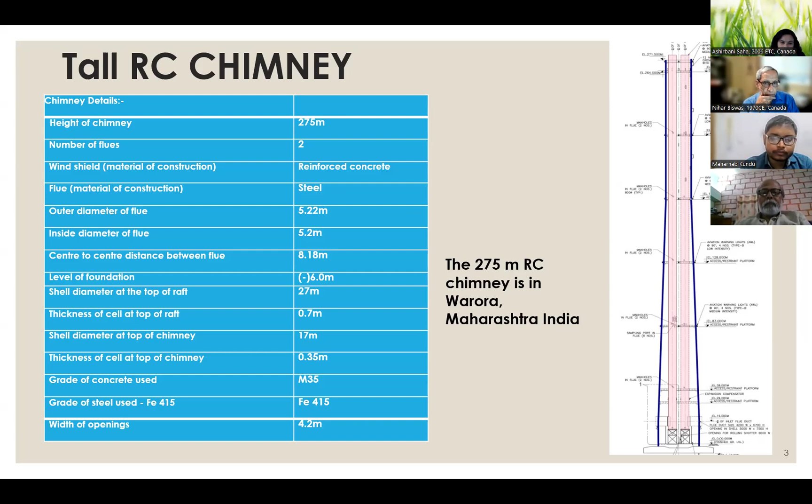Slipform is used for the construction of the chimney. Slipform is a process by which we construct the chimney, and as construction of one phase completes, it can go to the higher phase. It can move up by two processes: either by pulley and rope, or by manual handling. An advantage of slipform construction is that it increases the speed of construction, and different gradations of the structure can be constructed by the slipform process.

Now, why are we doing this research? The vortex effect is very important here. In a tall chimney, when wind comes in one direction, a low pressure is generated around the chimney on both sides, and due to this the chimney oscillates in the direction perpendicular to the wind. When this oscillation frequency matches the natural frequency of the chimney, resonance happens, and when resonance happens, the chimney can collapse after some time. This is the main problem of the chimney structure when we consider the wind load and wind effect.

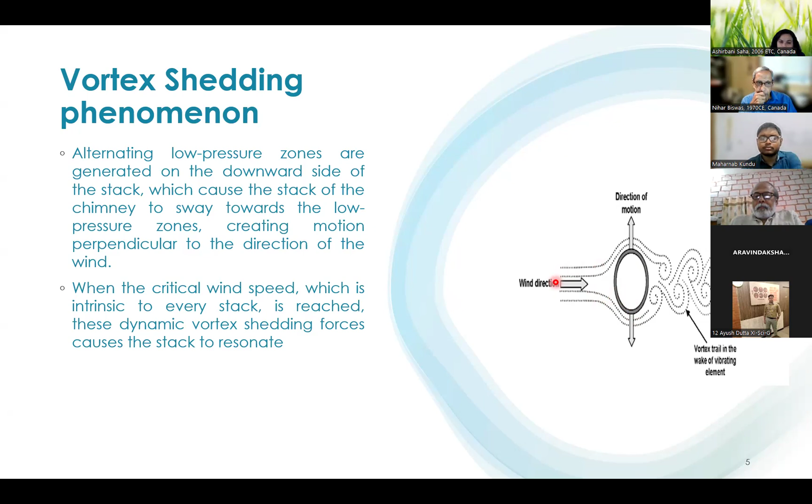So now the scope and objective of my project research work. I am doing research on numerical analysis of slipform structure, considering many effects: the vortex shedding effect, and the interaction between slipform and chimney. My contribution is the uncertainty in the stochastic load.

What happened when we are using the IS code model, the Gioson model, and also the stochastic model? What happened to the across wind in that direction, in the across wind method.

What is the vortex shedding effect? Also, the main part is the literature review on the stochastic approach. So what is that which I am going to contribute - that is my contribution.

So the methodology which I have followed: I have calculated the dead load, live load of the chimney and the slipform structure, the wind load along wind direction and the across wind direction. Across wind direction I have taken in three methods.

First is the IS code method, that is IS 4998:2015 approach. The second is the Gioson method, which is a research work by a scientist. From that, I have done the research.

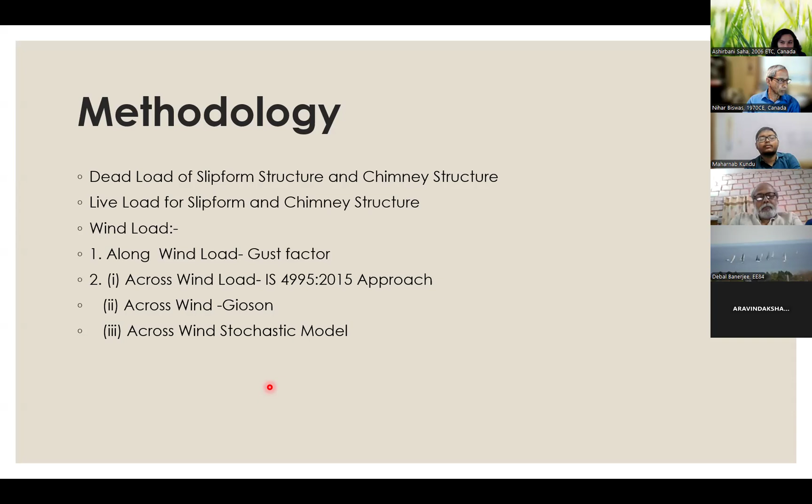I have done further research work on the across wind method, and also the across wind stochastic model. This is my contribution in this research work - the stochastic model of the across wind method, in which direction due to vortex shedding it can fail. This is an uncertainty method.

Here we can take an uncertainty factor. Also, this is a random factor we are using here, which can vary from 0 to 2 pi.

Due to this, what happens is because wind is a dynamic force, it can have higher velocity, also low velocity, and at different heights it can have different velocity. So we are taking a random value. Depending on this, we see what happens on the slipform chimney structure.

After my research work, I got into the results. Here are the three models I am taking for across wind. First is the IS code method, which is increasing linearly, and this one is the Gioson method. Here, the Gioson method and IS method are taking us closer to the original value.

What happens to the chimney at the high edge? It is taking a higher value. But when we take the stochastic model, there is a large difference compared to the initial two.

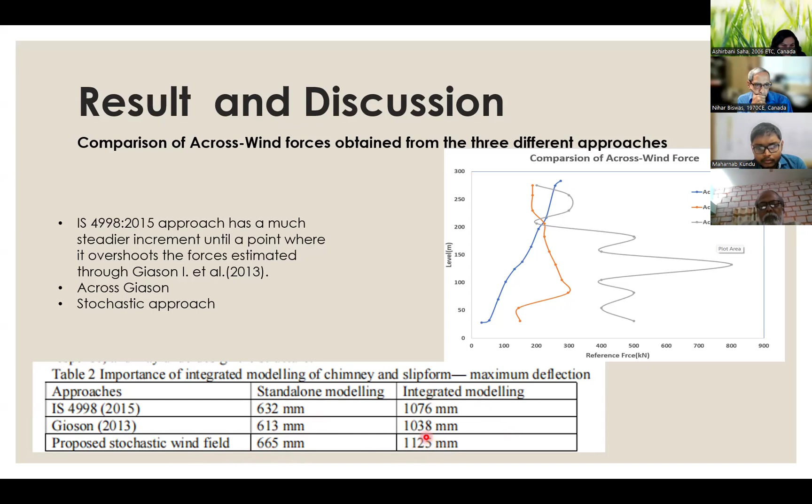This is the conclusion I made from the research work: we are taking the IS method and the Gioson method initially, but this may not be the safe method.

From the graphs I have plotted, we are seeing that the stochastic model shows there is a very urgent need to implement this also in our construction of the slipform structure, which can help the chimney structure last for a longer time. This is the conclusion from my research work.

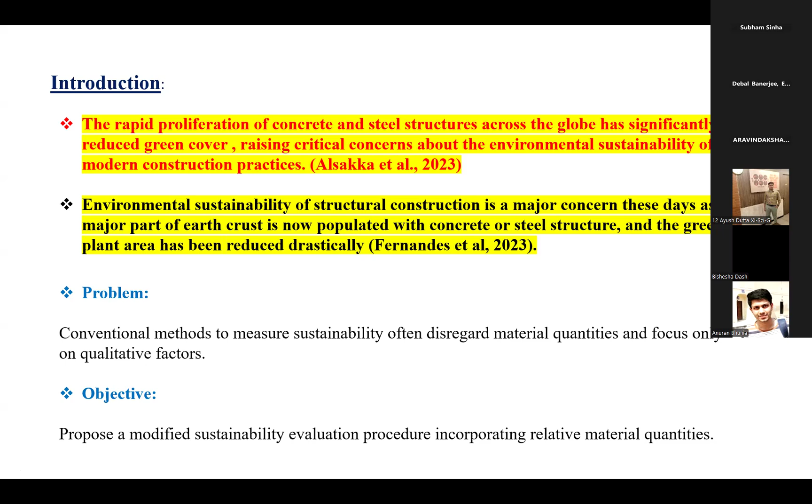Here are some studies that I reviewed for this project. The main paper was on the structural assessment of concrete structures within the Spanish structural concrete code, an ASC paper published in 2013, where they discussed the index of contribution to environmental sustainability, the ICES model. We have improved the ICES model to make it MICES, the modified ICES model. We also studied other works using similar mathematical models for housing interiors in Iran; in England/UK they used mass weighing criteria for different building systems; and in Spain they used such models to analyze government projects like buildings and mass housing.

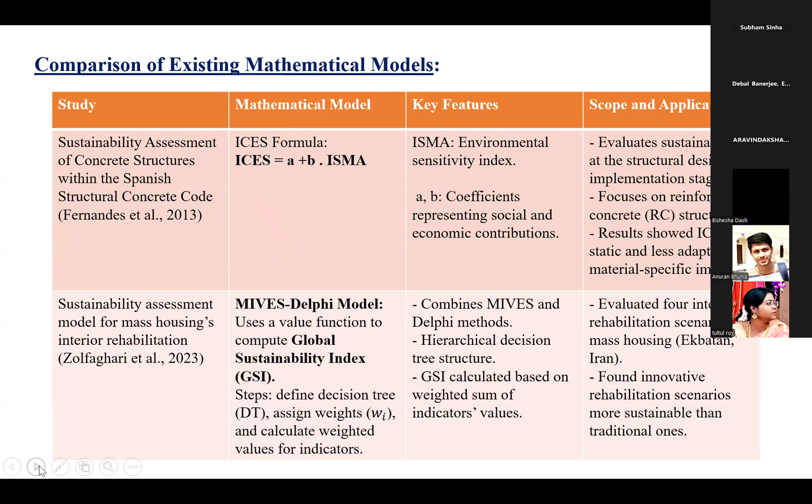Here are some mathematical models that I compared. This is the main formula: ICES equals A plus B times ISMA, where A and B are two different coefficients representing contributions due to economic, social, and environmental sustainability. Here are more mathematical models based on the same statistics, the MIVES, which I will explain later. So what we have taken is this volumetric weight decision criteria.

So this is the Spanish structural concrete code, which translated into English refers to the integrated value model for sustainability assessment. In Spanish, it is abbreviated as MIVES. This is the ISMA index.

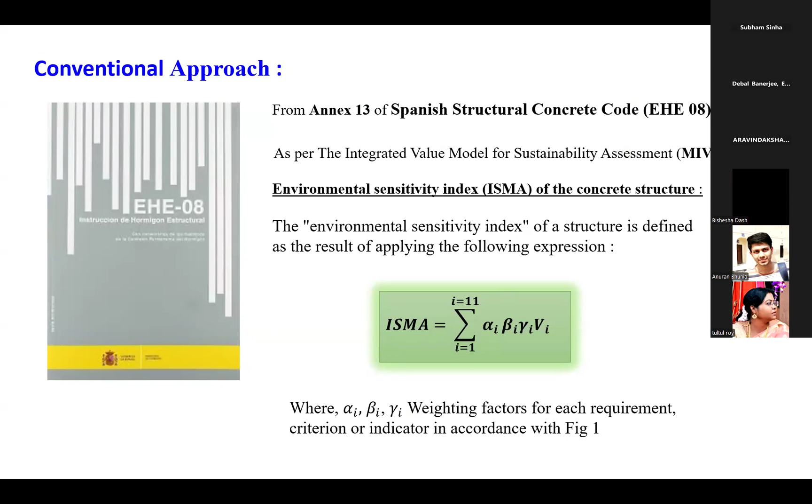The index depends upon four major factors: alpha, beta, gamma, and V. There are 11 different criteria that should be considered. These include characteristics of the concrete supplier and characteristics of the reinforcement supplier. This is a tree type of model.

It depends upon different environmental sustainability for different levels of criteria: the criteria level, sub-requirement level, requirement level, and assessment level. At the criteria level, which is the most basic level...

...we consider characteristics of concrete supplier and characteristics of reinforcement supplier. If the reinforcement is environmentally sustainable, there is still a characteristic - reinforcement reduction criteria: is the design optimal to use less steel or less concrete, or is the steel recycled enough? Recycled steel is more environmentally sustainable.

So VI is the value factor determining each criteria according to this expression. It is an exponential expression where KI, MI, NI are different small factors that have been broken down as per the Spanish structural concrete code, the EHE-08.

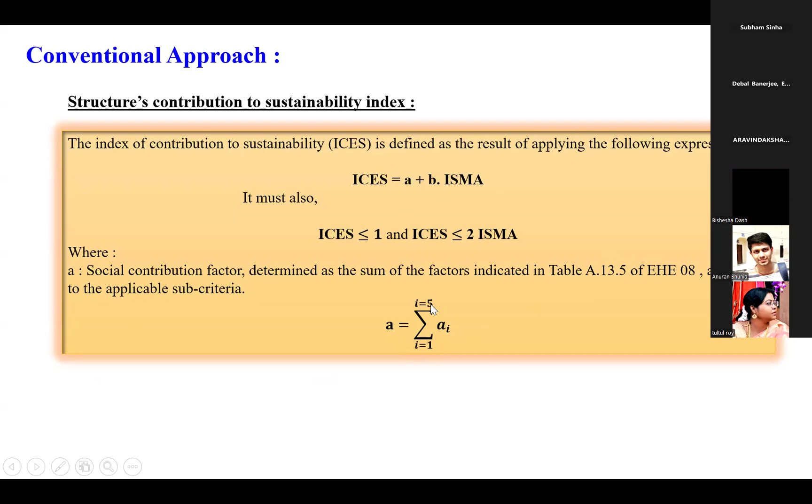After that, we get the ISMA value, and we have to multiply A and B. A is the social contribution factor, determined by the sum of different factors from table A.13.5 of the Spanish code, with 5 different criteria from the different models.

B is the working life - if a structure's life is long, it is more sustainable. We have to pay less, so it is also economically sustainable. From this model, we can get 5 different levels of environmental sustainability, from A to E. A is the maximum end of the scale and E is the minimum end.

So ISMA considers the environmental impact of the ingredients, waste recycling - particularly ferric waste - decreased CO2 emission, steel production, level of execution control, and different types of mixing of concrete.

For example, if concrete is mixed on site, there is more pollution - more dust pollution, air pollution, and different kinds of issues. Contractors may have to take different precautions to prevent those things, like spraying water or using some kind of barrier. Those are less environmentally sustainable.

What they have seen is that concrete pre-mixed from a ready-mix concrete plant is more environmentally sustainable. Precast concrete beams and precast concrete columns are also more environmentally sustainable since they come precast from the factory - we don't have to make the concrete or the design ourselves. Engineers design them and they are mass produced in the factory, so that is more environmental.

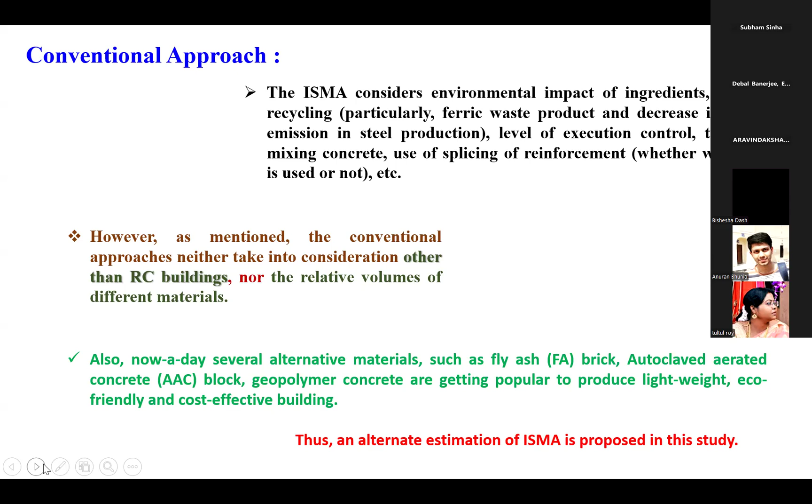The Spanish code gives different values like 0.2, 0.3, and so on. Here we have taken the materials we use in our day-to-day construction in our country, like India - reinforced concrete construction, clay brick construction, autoclaved aerated AAC brick construction, and fly ash brick construction.

From our literature review, we found that they have given some environmental sustainability index values to each of these materials. We can infer that autoclaved aerated concrete may be 1.33 times more environmentally sustainable than reinforced concrete, because it is precast and coming from the factory, mass produced.

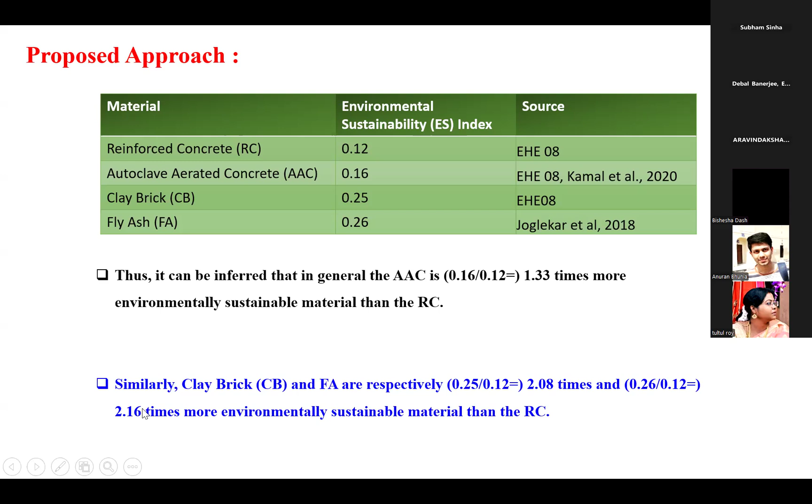Similarly, clay brick and fly ash brick are more like 2.08 times and 2.16 times more environmentally sustainable than reinforced concrete. So we can compare different values and get 1, 2.08, 2.16, 1.33 for different materials as compared to reinforced concrete.

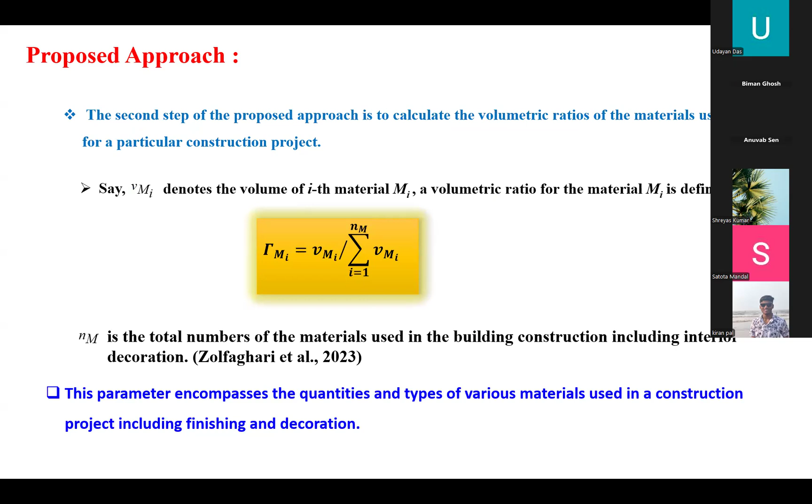Then we have calculated the volumetric contribution for each material. Like we have concrete columns, concrete footings, but we might have clay brick walls or autoclaved aerated AAC brick for parapet walls or non-load bearing walls. So there are different materials which have different volumetric contribution to the whole project.

This is the modified value where we have multiplied the different values - the summation of different values and the relative environmental sustainability assessment of their materials. Then we have proposed this MICES, the modified ICES model.

Similarly, if we use 50% for RC construction and 50% clay brick, as in my example with concrete columns, concrete footing, and clay brick walls...

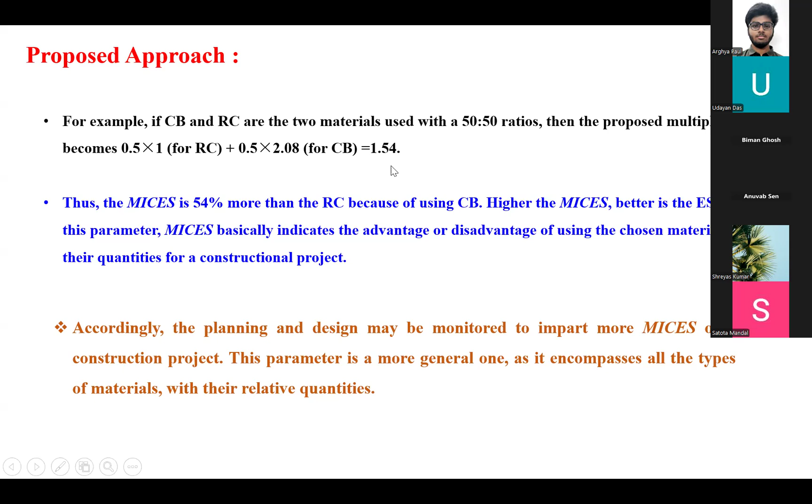What we have found is that the existing model gives 0.14 to every material, which is not correct. But our own model, the modified ICES, MICES model, gives different values to different materials. So we are getting an interesting result that we can compare different materials for their environmental sustainability.

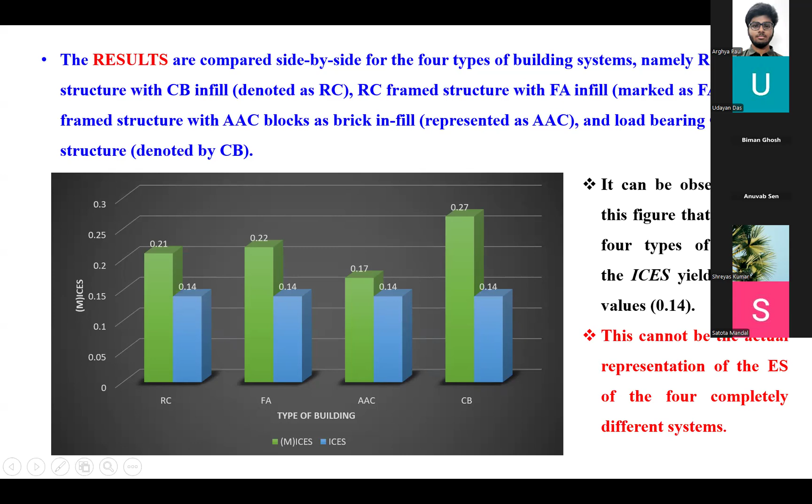So we are getting that the load bearing clay brick has the highest MICES value, and the autoclaved aerated concrete, AAC brick, has the lowest MICES value.

You need to wind up fast, huh? Okay, need to wind up fast.

Okay sir. So what we have found is that the RC system utilizes clay brick infill, which enhances overall sustainability, and the AAC system is lightweight and cost effective.

The new ES measurement is for the construction project. A modified version of ICES is defined, which is taken into account for new environmental sustainability measures, and the effectiveness of the proposed environmental sustainability approach is well established with the two-story building from our numerical study.

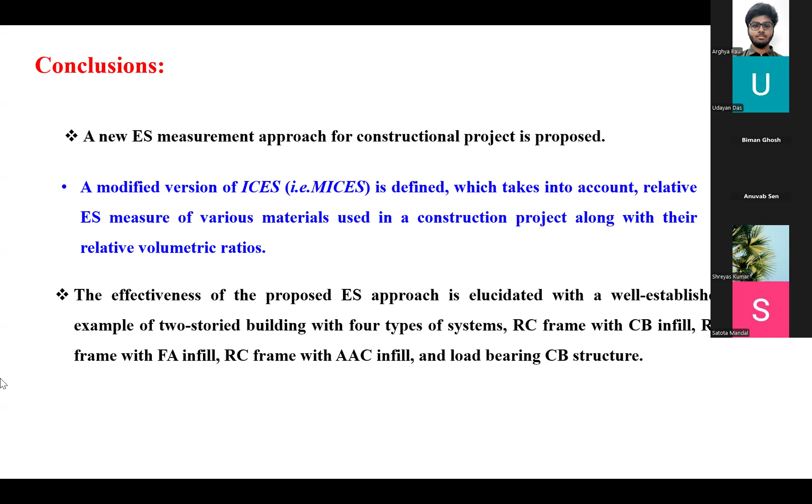So here is our conclusion: the approach we developed is generic and can be applied for any kind of construction. But for better understanding of our model, we need huge data, which is not so possible to collect in our country, where the construction industry is not so well regulated.

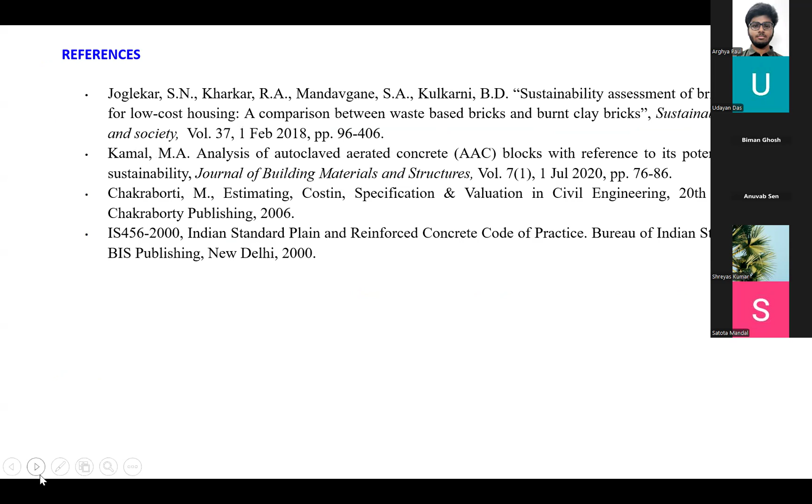Yeah, Arnab, it's a very nice presentation. Before the others start discussing, I'm just going for a very fundamental query. Sustainable is a word available in dictionary, its meaning is very clear. But does sustainable have any relation with the United Nations? Does the term sustainable have any relation with the United Nations?

Do you know it? Sir, sustainability came up like after 1950, when we got to know about global warming and the ozone hole destruction and all the other things. When we got to the key causes of all the effects, we found that more carbon emission, more construction is a huge part of our pollution. So, yeah, United Nations came up. Carbon emission is related to climate change.

But does sustainable development relate to sustainability, sir? Are you aware of the term sustainable development? No. Yes sir. I mean, does it have any relation with United Nations? Yes or no? No. Okay fine. So I think, no sir, it's a global term, development goal.

Yeah, sustainable development goal, Parthoda is asking. Any idea? There are 8 criteria for sustainable development goals. I couldn't remember every term, but I know there are 8 or 10 different points that they have pointed out. The point is, whenever you are going for the Goal 12 index, it is directly related to your work. Yes sir.

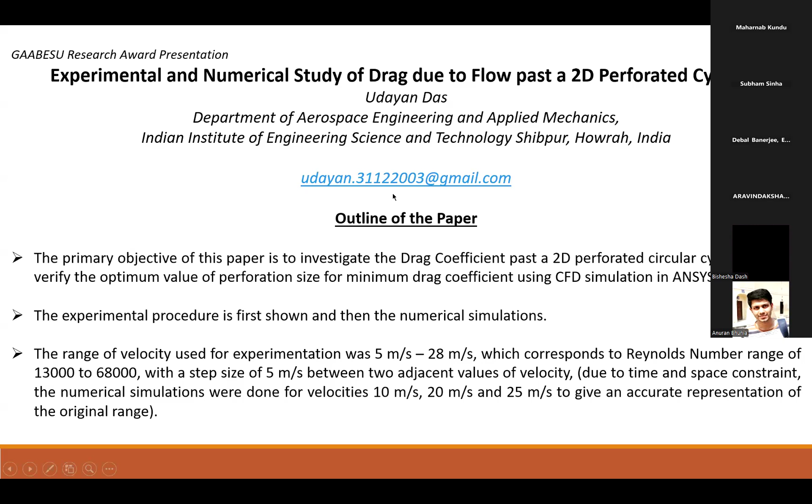Now the baseline data - the baseline data was actually the cylinder without any perforations on it. That was the baseline data.

Now the baseline data was actually verified with existing literature by Dr. Bearman. Figure 4 is the existing literature and figure 3 was a plot that I got. For Reynolds number in this range, from 13,000 to around 68,000, the value of the drag coefficient is coming close to 1.2, which is actually verified from the plot here. As you can see, the CD value here is also close to 1.2. So our experiment is on the correct track.

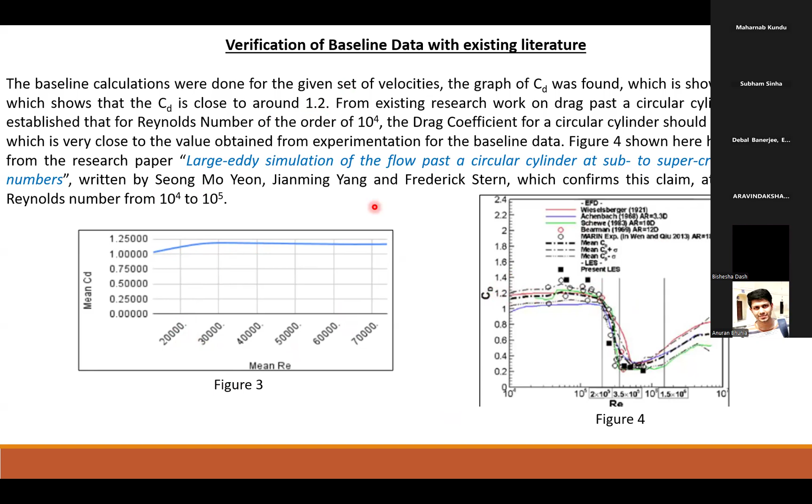Now after the experimentation, these results were obtained. In these results, how we made the perforations was: in one of the stagnation regions of the cylinder, the perforations were kept constant at around 1 mm. For the other stagnation region, the diameter of the perforations was changed from 1 mm to 1.5 and to 2, with a step size of 0.5 mm, continuously increasing the perforations.

Now for the numerical simulation, this mesh was made. You can see this is the ambient flow field and the cylinder is somewhere in the center, and this is the magnified view of the mesh around the cylinder. Another thing to be noted here is that I did not mesh the wake of the cylinder - I did not refine the mesh at the wake because in this paper we are not studying the wake of the cylinder. Basically, we are studying the flow over the cylinder.

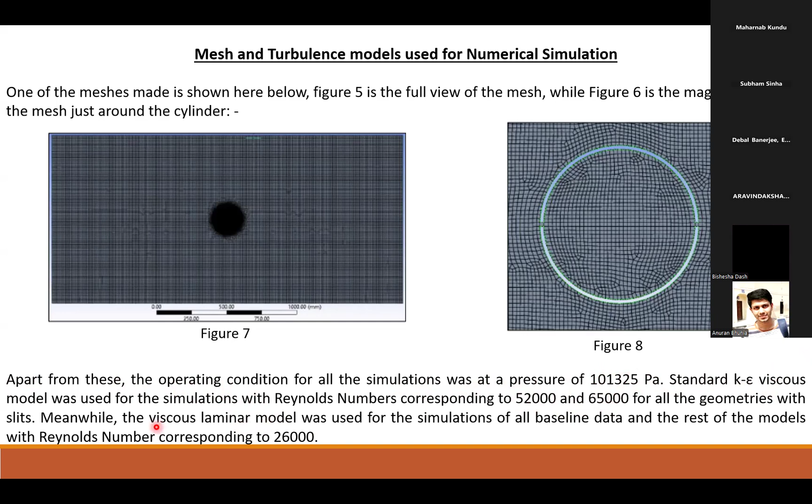The operating condition for all the simulations was a pressure of 101325 Pascal, the normal atmospheric pressure. Standard K-epsilon viscous model was used for the simulation with the higher Reynolds numbers, 52,000 and 65,000, while the viscous laminar model was used for the lower Reynolds number.

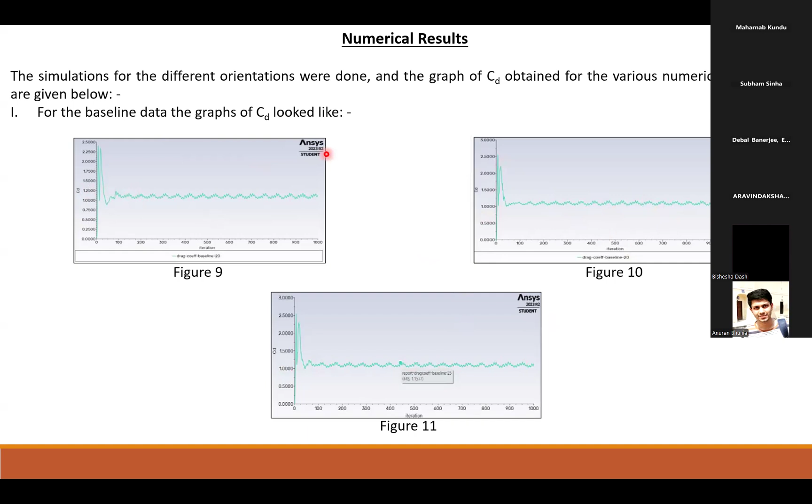Now these are the results obtained from the numerical simulation in ANSYS 2023 R2. This is the result for the baseline data, and we can see that just like the experimental data and existing literature data, the drag coefficient past the cylinder should be close to around 1.2, and that is even visible here, close to 1.2. So the numerical simulation is going in the correct direction.

The upcoming plots that you can see are for the other orientations of the cylinder, as you can see. So I will just go past all this and directly come to the final result here.

Now the trends can be seen below. Here are the legends that are given. These points in black are for the baseline data. The left plot is for the forward stagnation region where perforations were of higher diameter, and the rear stagnation region perforations were kept constant at 1 mm diameter.

And the plot on the right is for those orientations of the cylinder where the forward stagnation perforation was kept constant at 1 mm and the rear stagnation perforations were changed. One more thing I want to add is that the x-axis actually represents the Reynolds number - I forgot to label the axis. The x-axis corresponds to the Reynolds number, and the y-axis corresponds to the drag coefficient of the cylinder.

For the baseline data, we are getting the highest drag coefficient, which should be there according to the experimental data too. And for 1.5 mm perforations, we are getting the least. This numerical solution verifies the experimental data too - in the experiments also we got the same result, where for the perforations of 1.5 mm, the drag coefficient was the lowest.

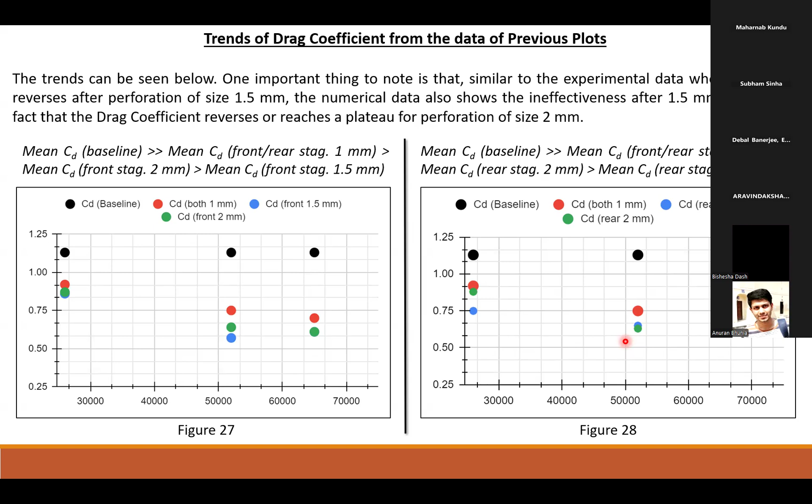So the optimum value is 1.5 for a cylinder of diameter 40 mm. Now, if the cylinder diameter is changing, we can use the ratio, that is 1.5 by 40, and find the new optimum value of the perforation size.

Now, future scope and industry application for this study was actually reduction of drag. This study can be extended for airfoils and for practical aircrafts. If drag is reduced, lower fuel is consumed, and if lower fuel is consumed, the carbon footprint is also lowered. So that is one industry application.

Like this has not been used yet. First you have to check it numerically for an aircraft, and then if the numerical solutions are promising, we can use it for the experimental, and then for a practical aircraft too. So that was the end of my presentation. Thank you.

Done, it's a good presentation, but you have taken a little bit more time. Anyway, that's an enthusiastic presentation. There was some technical problem also related to you, may not be fully you responsible for that.

Anyway, so my only question is, you mentioned about Bernoulli's equation, no? Yes sir. So do you know any equation called Navier-Stokes equation? Yes sir, I know the Navier-Stokes equation. So what is the basic difference between these two? Any idea, just fundamentally?

Sir, in the Navier-Stokes equation, actually the density term also comes. For a basic incompressible inviscid flow, we can use the Bernoulli's equation. For a compressible, more complex flow, we can use the Navier-Stokes equation, which can explain this too, but that would just complicate matters. So I haven't used it there. It was just a basic incompressible flow, so that's why Bernoulli's equation is enough for this.

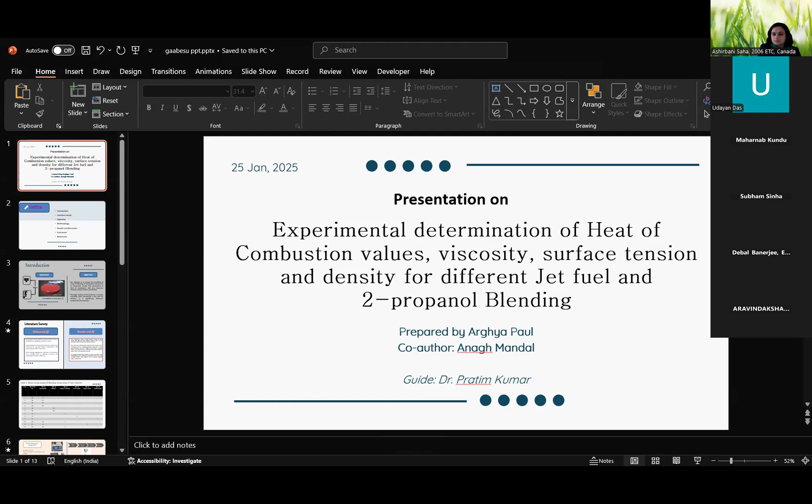for different jet fuel and propanol blending. These are all the properties of a fuel which should be determined to judge whether the fuel is applicable for use in a commercial vehicle or not. This is the outline for my presentation.

The motivation behind this project was to consider the pollution coming from the airline industries, which is basically 2 to 3% of global carbon emission and less than 3% of global NOx emission. So our objective is to find the accommodation of a new blending fuel in the industry, and that's why we are finding the fuel properties here.

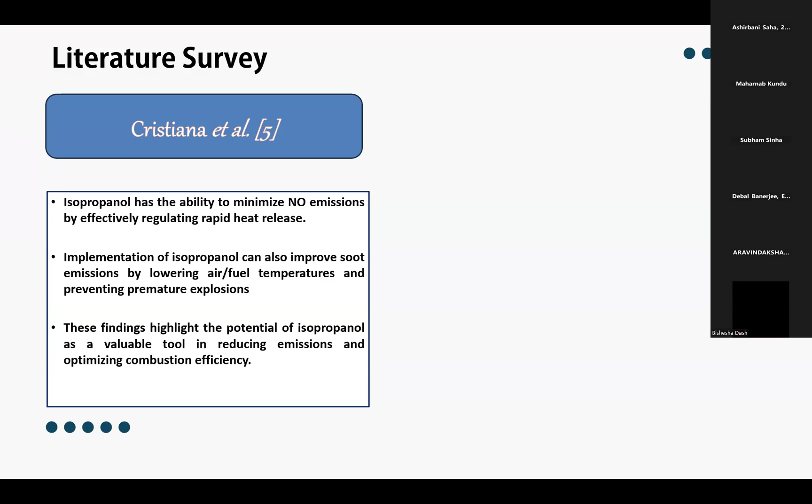This is the literature survey done by Cristiana and his team. They suggested that isopropanol, which is basically propanol-2, can be used to minimize NOx emission and to minimize carbon emission. Also, this has a potential to be used as a fuel.

Next, Karmakar and his team conducted an experiment on butyrate and jet A1 fuel blending. They showed that this kind of fuel can be used in commercial vehicles without changing the engine configuration, which is a great advantage for our industry purposes.

This is the total fuel composition which we have prepared. There was pure jet fuel, also blended with isopropanol, ethanol, copper chromite which is a solid substance, ferric oxide, cupric oxide, and cobalt oxide.

These oxides have been used to check whether the heat of combustion value is increasing or not, because this solid substance acts as a catalyst. That's why we use this.

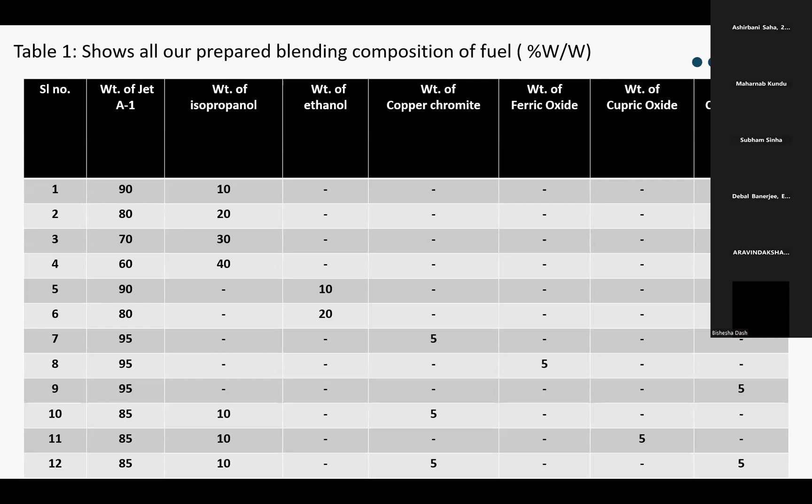Our primary goal was to find the suitability of isopropanol, and ethanol we just did for our reference purposes.

The process is: first we took the wire and thread, then we separately measured the components and prepared the samples, then immersed the thread into the sample, and then assembled the bomb apparatus. This is the temperature probe which we inserted in the jacket, and the microprocessor calculates the heat of combustion values basically.

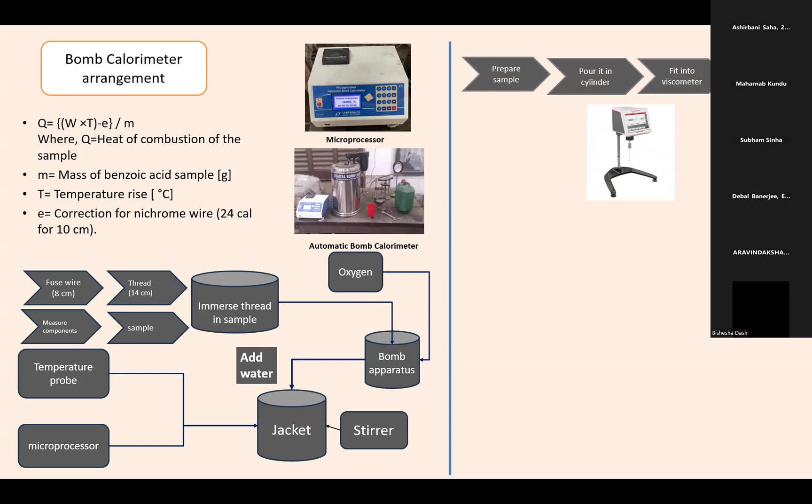Now I'm showing the determination for viscosity. This is the Anton Paar rotational viscometer which we have in our lab. We prepared the sample, and there was one cylinder attached here. We put the cylinder in, and it gave us the values of viscosity.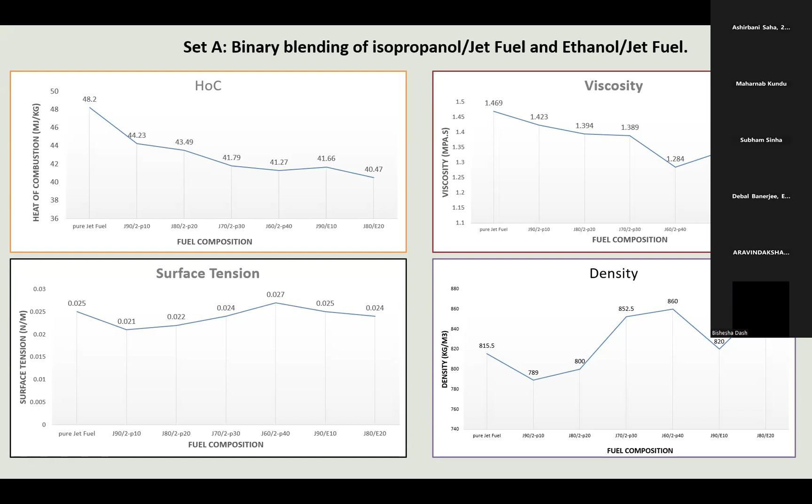But here I want to mention that the heat of combustion values we got for jet fuel 70% with 2-propanol 30%, and jet fuel 80% with 2-propanol 20%, all these values fall under the threshold value given by the authorities.

This moves to another set of results, set B and set C.

So here I am showing the heat of combustion values for these two, and this is also decreasing. This is because I am reducing the percentage of the jet fuel, and also using different kinds of oxides, as mentioned here.

And here we couldn't calculate the surface tension and viscosity, because this was a millimeter dimension, basically for the oxides which we have. So the instrument we have in our lab cannot determine these values.

So in conclusion, basically we can see this jet fuel 90% and 2-propanol 10% produced a heat of combustion value of 44.23 megajoule per kg, which satisfies the ASTM standard. So that's the thing I was talking about.

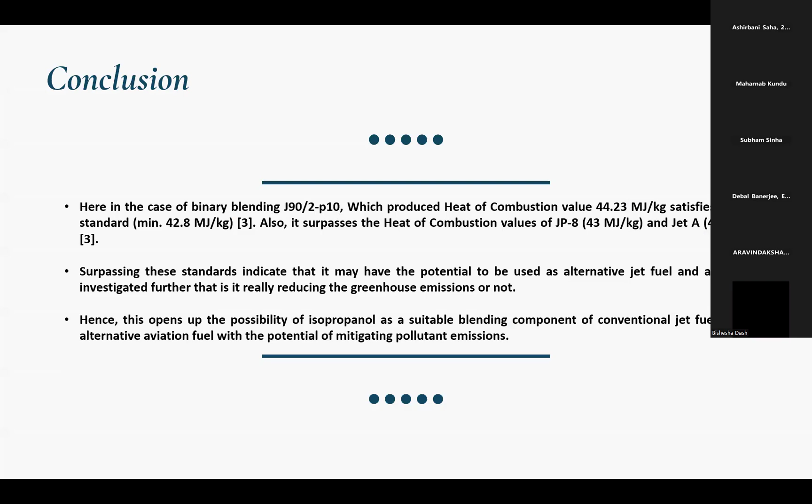And finally, I will consider that this can be used for further extension of research, which can lead to blending fuel that can be used in commercial vehicles without any kind of modification in the engine. So these are the references, and thank you.

So, Arghya, you had an objective of finding out a new suitable fuel by blending already available or used fuels, is it? Sorry sir, I couldn't get it, can you please repeat? So your main objective is to create new fuel by mixing already existing fuels, is it? Yes sir.

So on the basis of certain properties or criteria of fuel, you have tried to relatively evaluate the suitability of fuels, is it? Yes sir, density, surface tension, and calorific value or heat value, is it? Yes sir, basically we calculated only 4 properties for the blending fuel.

But can you give a brief indication, if these values do not converge, what will be your selection criteria? Sir, basically there is nothing to converge or diverge here. ASTM is a body which regulates the standard values for fuel properties that should be there to use in commercial vehicles. So if this fuel doesn't fall under those conditions, we should ignore it and not consider it as a fuel.

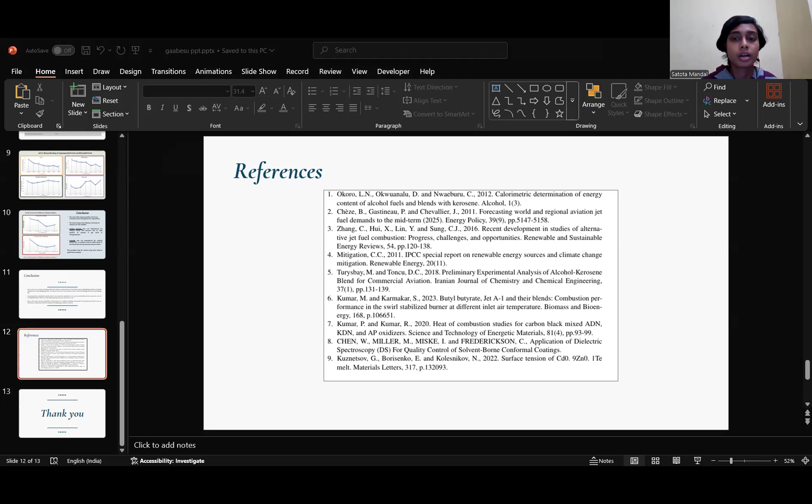Previous one is here now, Arghya Paul is over, Satota is joining now. Okay, yes, but the slide has to be removed. He is sharing his document. Oh, he has removed his sharing.

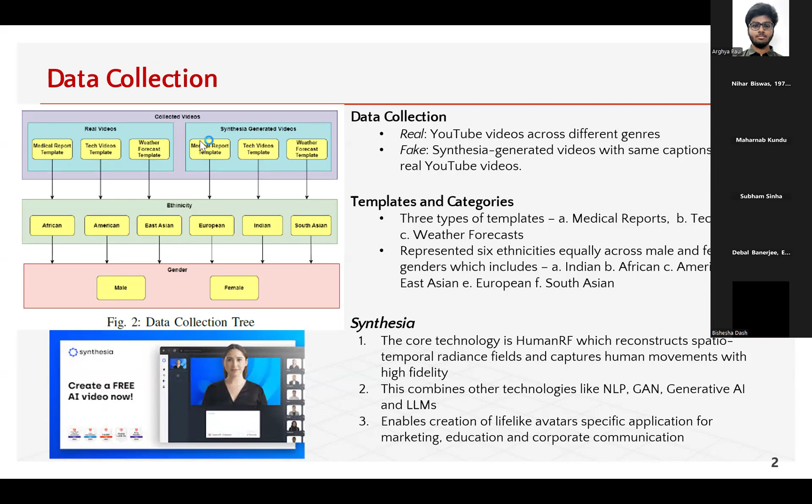Valence represents emotional positivity or negativity. High valence represents a person who is very happy, and low valence represents emotional negativity, that is, how sad a person is. Similarly, arousal is another emotional cue which represents emotional intensity. High arousal means a person is very excited, and low arousal means the excitement in that person is less.

In our first proposed method, the statistical method, we observed that fake videos depict high valence—videos generated from Synthesia represent much more positivity in facial structures—while real videos collected from YouTube depict high variability in arousal, meaning emotions vary more in intensity in real videos.

Our key parameters for observation are area under the curve for detecting high valence and standard deviation for detecting variability in arousal. We have used various supervised classifiers trained with these standard deviation and area under the curve parameters, with a training and testing ratio of 85% and 15%.

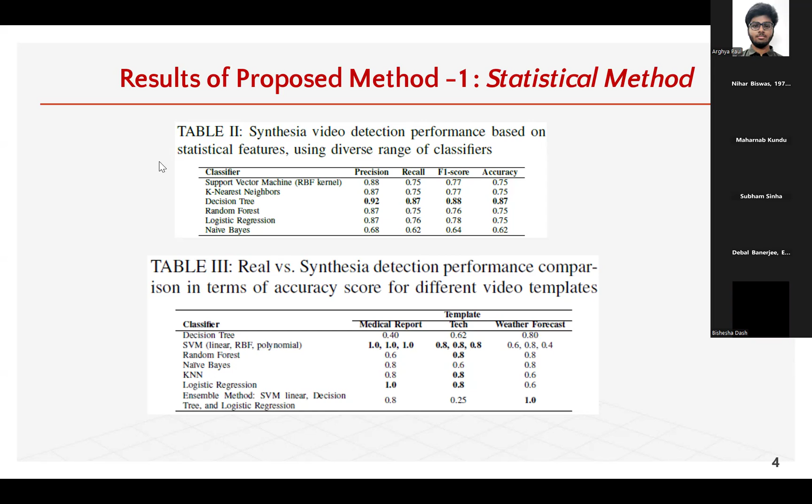The second proposed method is a deep learning based method, where the main principle is temporal variation in facial expressions analyzed for authenticity through a vision transformer.

For this, we collected real and fake Synthesia-generated videos and divided them into training and testing ratio of 90:10. We divided all these videos into frames, with frame per second (FPS) of 10, then converted these frames into input images of 224 by 224 RGB format, and resized this image to 72 by 72 pixels.

We divided each image into 6x6 pixels, resulting in a total of 144 patches per image. For each RGB image, the elements per patch become 108. We have manually verified the quality of the extracted face regions. This is the pre-processing process I followed for the vision transformer model, and this is the architecture I used in this work.

For the whole dataset, we achieved an accuracy of 98% for the fake and real classes.

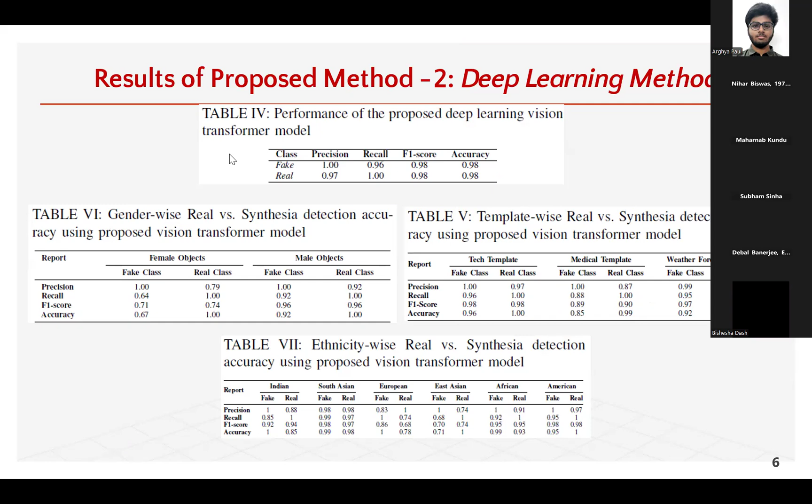We also tried to see the accuracy level for different templates, for each ethnicity, and for both male and female genders. In conclusion, real videos display different emotional complexity than Synthesia-generated ones. The vision transformer model proved that temporal variation detection is effective and outperformed statistical methods in accuracy, and emotional cues like valence and arousal can establish a robust framework to address future deepfake identification.

In future, we can diversify our dataset with more templates available in Synthesia. We can also include different platforms which may be based on different technology, to identify whether these emotional cues can determine if videos are generated or not. For emotion detection, we can also include audio and speech rather than just facial expression from images, which can further aid the identification process.

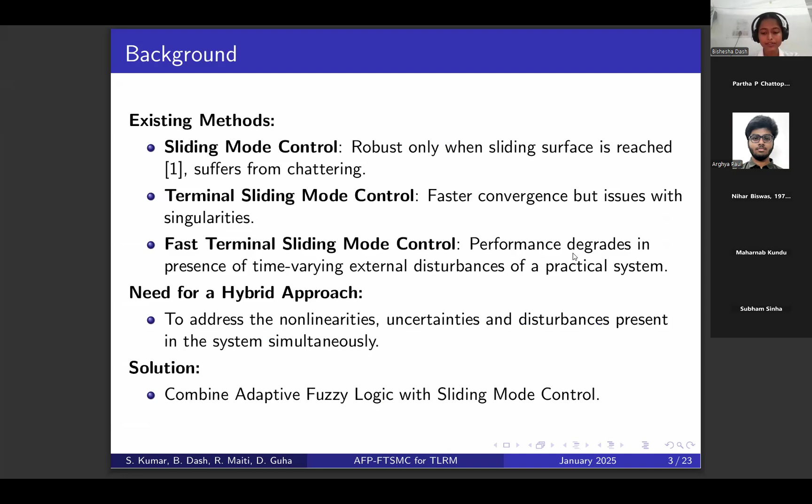We also have FTSMC, but the problem here arises in the presence of time-varying external disturbances, and thus we need a hybrid approach to our solution. So we first estimate the disturbances using an adaptive fuzzy predictor and then address the nonlinearities using FTSMC.

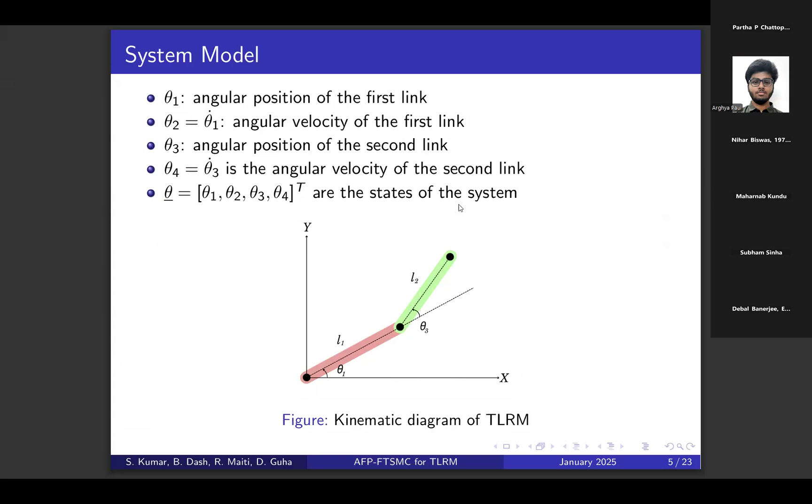For the system model, we have four state variables that we use to define our system: theta1, theta2, theta3, and theta4. We use them to define the angular position and angular velocity of the system.

The proposed methodology we used here is the adaptive fuzzy predictor to estimate the disturbances, and then FTSMC to remove those disturbances. Since it is a sliding mode controller, it will also remove the non-linearities.

One thing to focus on here is theta tilde. That is the error we are getting from the difference of the thetas, one from our system and one from our predictor.

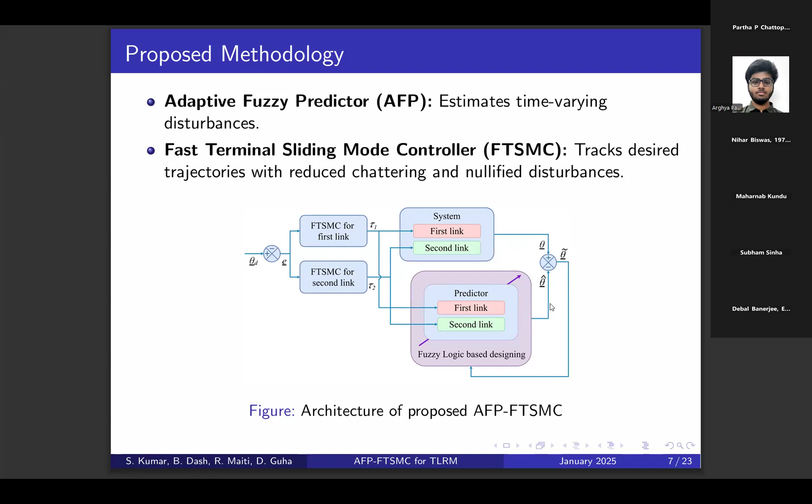Coming to the adaptive fuzzy predictor part, fuzzy logic controllers are universal approximators which can be used to estimate the time-varying disturbances. Here we are using some if-then rules, which give us the model dynamics of the predictor.

This is one of the if-then rules that we used here, and we are getting theta1 double dot and theta3 double dot, which are the angular accelerations of the system.

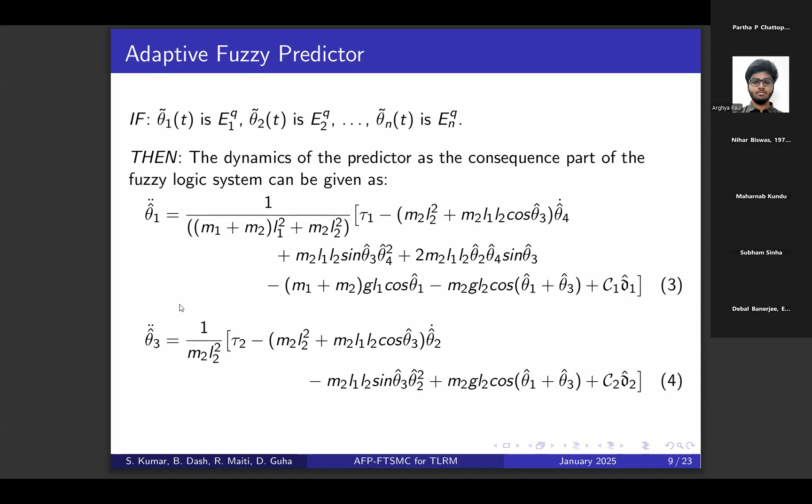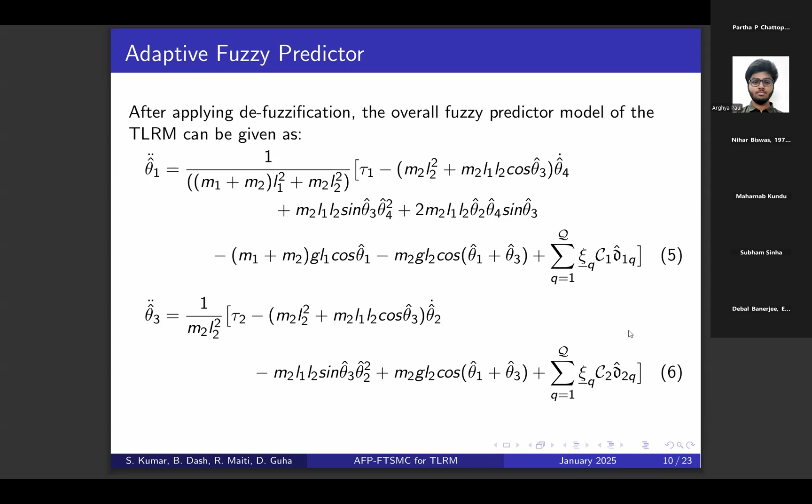Combining these equations, we get the fuzzy predictor model. You can see that D1 and D2 are the disturbances of the system. Summing all of these theta1 and theta3 dots over Q rules, we get the fuzzy predictor model.

Coming to the error dynamics part, we have theta tilde, which is the difference between the actual state and predicted state. This is the equation that we are getting for it.

For the stability proof, we have to ensure that our designed system is stable. So we are using a Lyapunov candidate vector, shown here. V0 is the quadratic energy function, and its derivative is V0 dot.

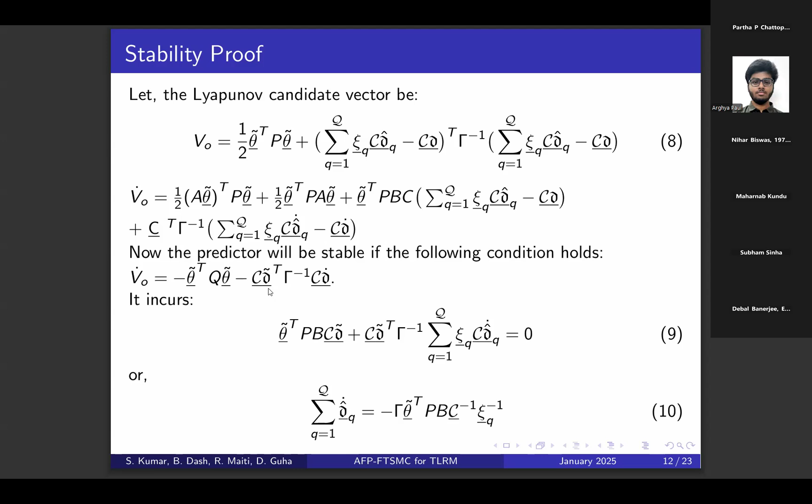The predictor will only be stable if this condition holds true, meaning we have to equate the positive part of the derivative, V0 dot, to zero, as we want it to be negative definite. Thus, we get equation 9, and from that we get equation 10.

These are the predicted disturbances that we get using the adaptive fuzzy predictor part. Coming again to the sliding mode controller part, we have accurate tracking for nonlinear systems.

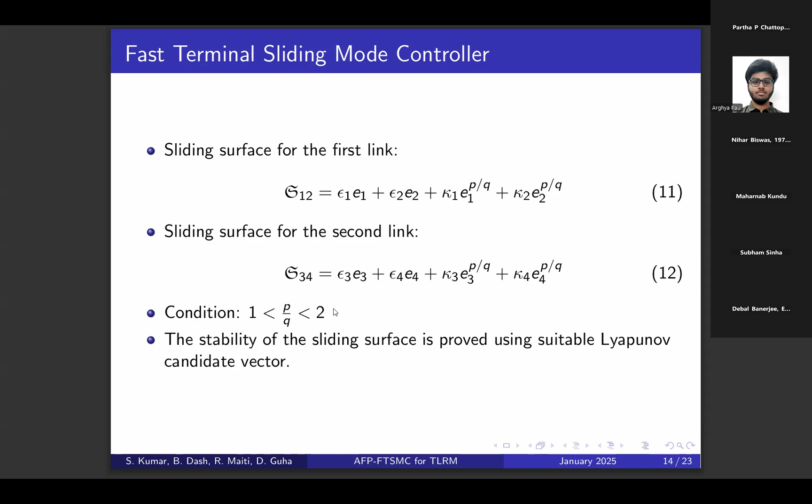To estimate the non-linearities, we use this approach. For stability, as mentioned before, we use Lyapunov functions, which will effectively reduce the chattering. These are the sliding surfaces and the equations for the sliding surfaces. We have chosen the values of P and Q such that this condition holds true, as we are using the Lyapunov candidate vector.

Now coming to the results, our reference signal is shown here in blue color, as you can see here. And you can see that our proposed AFP FTSMC is able to reject these disturbances, which the baseline TSMC was not able to do.

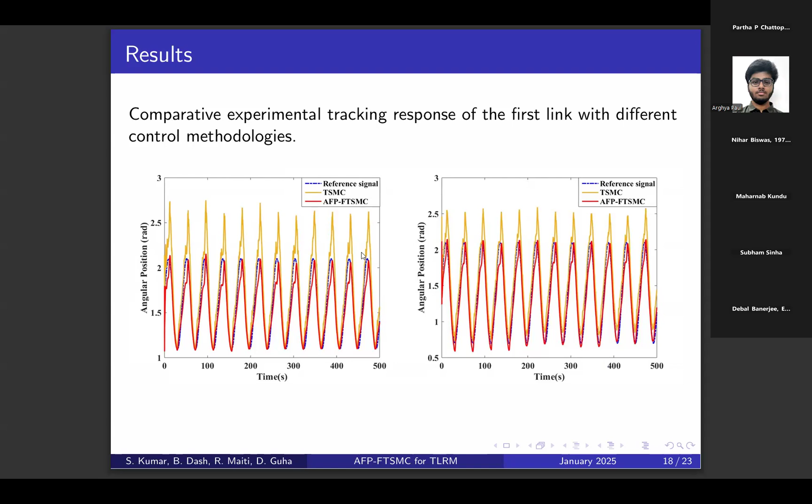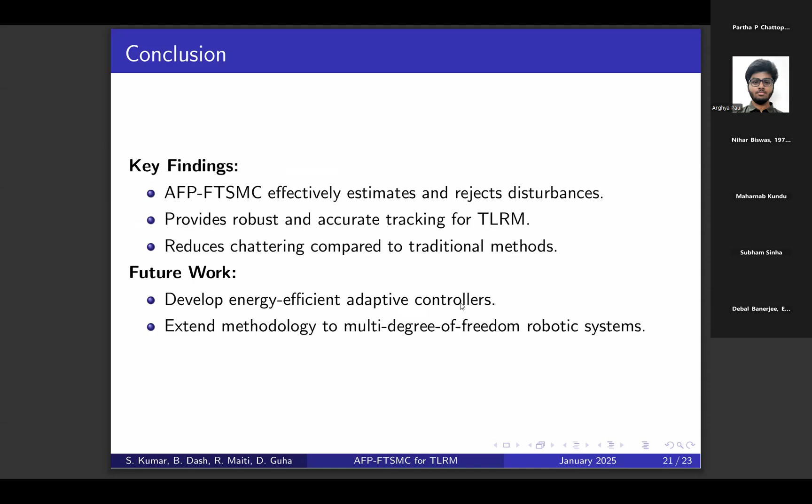In conclusion, the key findings were that we were able to achieve all the objectives in the real world system, where we have time varying external disturbances and a nonlinear system. Also, in our future work, we are trying to develop an energy efficient adaptive controller and to extend this methodology to a multi-degree of freedom robotic system. These are some of the references that we used. That's it.

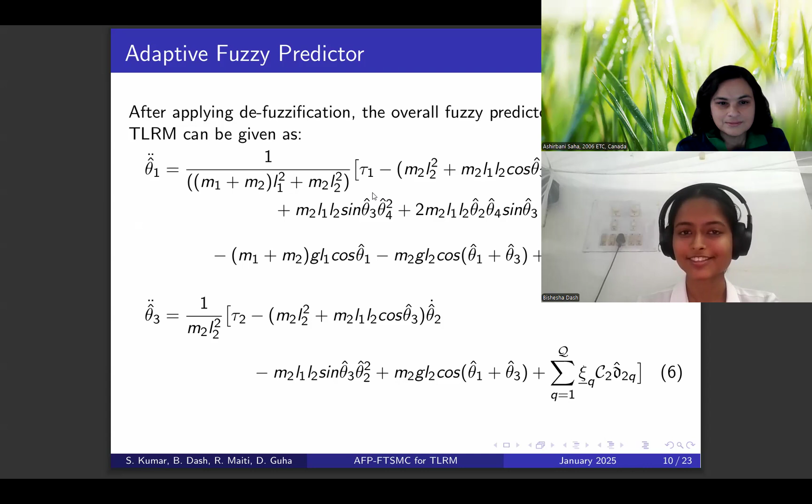Bishesha, you have picked up undoubtedly a rather not very easy problem, so that's good, I mean you have taken that challenge. But I just want to know, you had some experimental setup, so was it in IIEST or outside? No, we designed it here in IIEST, and the setup was also in IIEST.

So your supervisor, the 3D printed model. Yeah, but his supervisor is from electrical. Yes, electrical department, also IIEST. This has been installed in the electrical department. No, it is a remote installment, like it is not fixed. We can carry it anywhere.

Okay, okay. Because you have carried out both the theoretical model and experimental validations in this particular system, is it? Yes, yes. Okay, so we needed that.

Anyway, so the final query for me is, you have used so many equations which you have shown in the presentation. Do you understand the solution methods of these equations, or you don't need it at all? Solutions as in? I mean, whenever you are showing some equations as a part of your work, you need to know the solution methods of those equations also, isn't it?

Actually, some of the equations that we used, we have taken the derivatives and substituted them into some other equation. And for the equation that we substituted it into, we need the solution for that equation. So I know the solution methods for the equation that we have substituted into. Okay, fine. So anybody else?

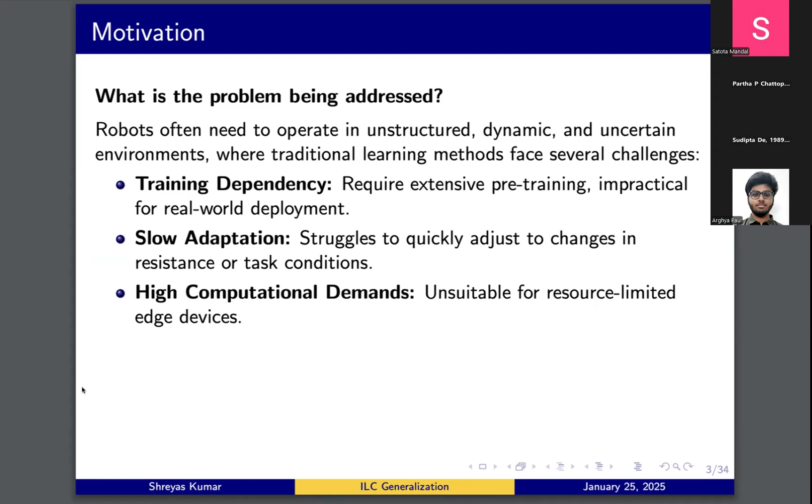Now, the proposed method: we have proposed a novel iterative learning control-based approach. The novelty is that we can deploy this directly without prior training in simulation or hardware. The method can rapidly adapt to unknown resistive fields or closely related tasks or environmental changes in very few trials, and it is very simple computationally—just one equation which we use in very powerful ways.

What is generalization? In ILC specifically, it's applying your learned skills to new scenarios. The scenarios can be new, but they have to be a bit similar—that is one limitation. A lot of work has been done proposing enhancements in ILC, including transformations and a few others which I'll cover throughout the presentation. We have also done experimental results which validate the effectiveness and the claims I'm going to make.

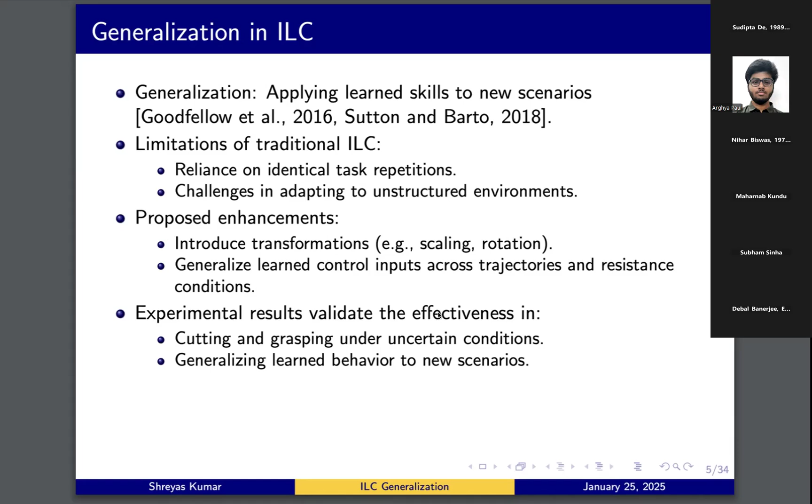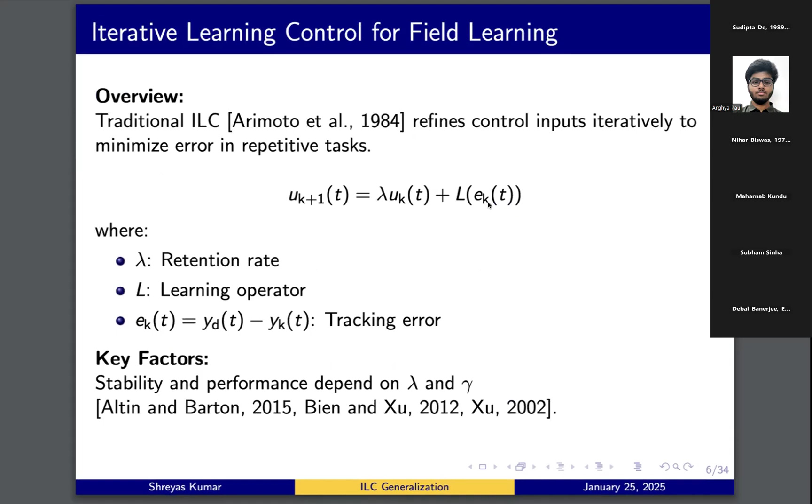Iterative learning control for field learning: the traditional method is u of k plus 1, the next control input, equals some constant times your previous control input plus some constant times your error. This is a very simple equation which turns out to be very powerful depending on how you use it.

Learning control input for resistance field is something we are going to do—this equation will be learning the control inputs when the inertia of the object is unknown, when there are different external forces acting on it. We have also tried to simplify the application so that we can control nonlinear robot dynamics as well, which I'll explain in the upcoming slides.

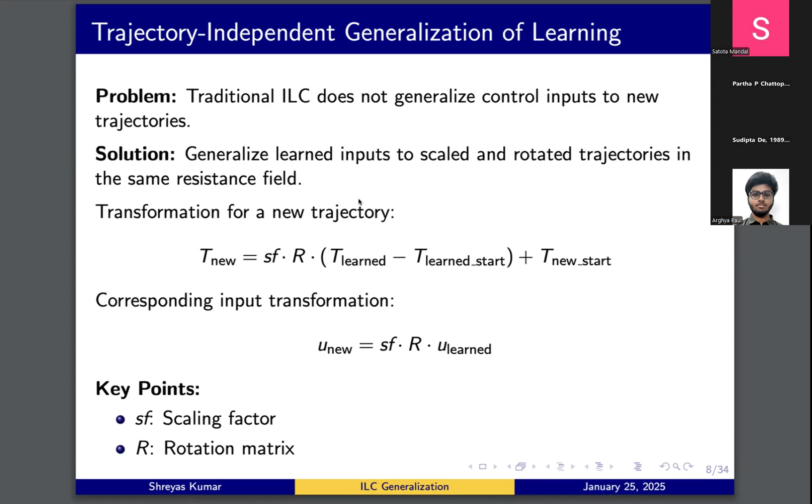Trajectory independent generalization of learning: if I have learned a trajectory using ILC and want to generalize it to a different trajectory, because this relationship is linear, I can scale and rotate it to create a different trajectory. This equation captures that, where SF is my scaling factor and R is my rotation matrix.

An extension of this to basis learning: the beautiful part is I can take these trajectories and create small trajectories which can be line, parabola, or cubic curves, and merge them together to have a control input for my new trajectory.

The advantages are it reduces the need for exhaustive training and it allows for deployment to new tasks efficiently.

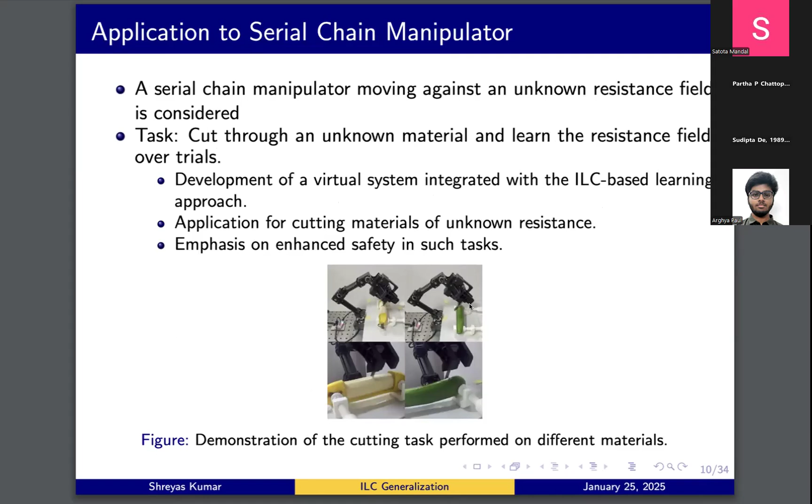The first application is to a serial chain manipulator, where the task is to cut through unknown material and learn the resistance field over trials. We developed a virtual system integrated with an ILC-based learning approach, applied to cutting materials of unknown resistance, a banana and a cucumber. We'll show how using ILC, just one equation can do wonders.

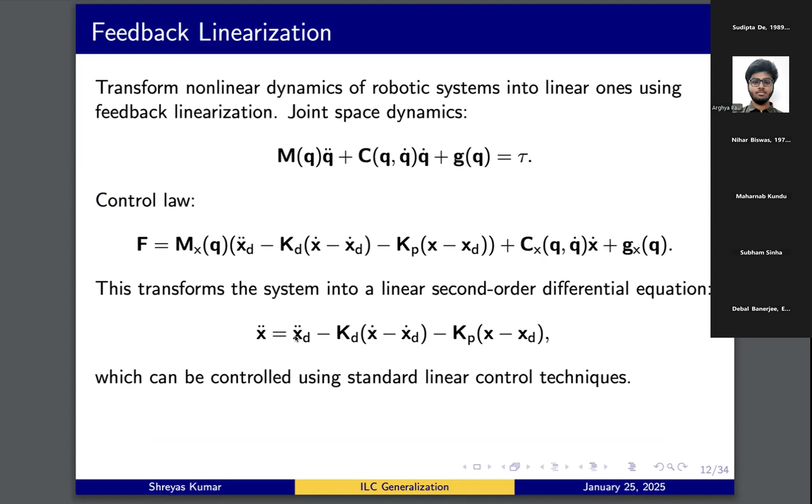The scenario was cutting a banana and a cucumber. The blade initially cuts the banana and learns the resistance forces over trials 1 to 34. Since it's iterative learning control, I'm going trial by trial, and from 1 to 34 the blade learns to cut through the banana.

Now suddenly I introduce a cucumber alongside the banana. The robot detects this increased resistance and stops cutting to prevent damage. This is one claim, the safety of iterative learning control. The safety mechanism activates on its own and the cucumber remains uncut. I want to emphasize this is just one equation acting, we haven't done anything else.

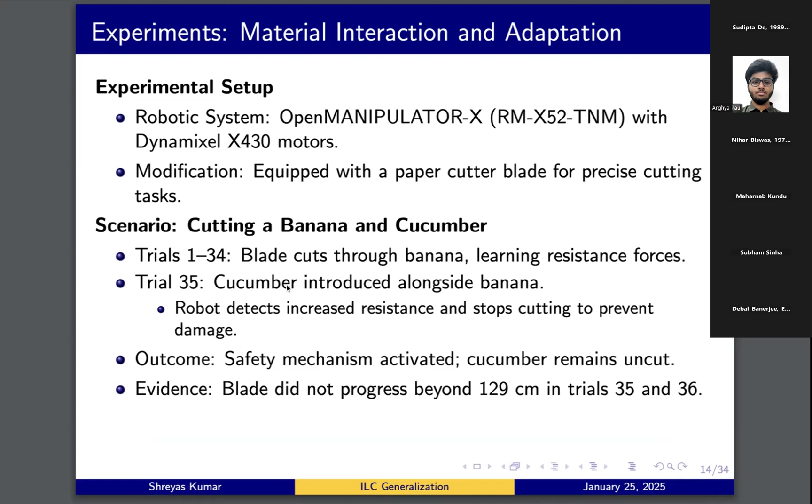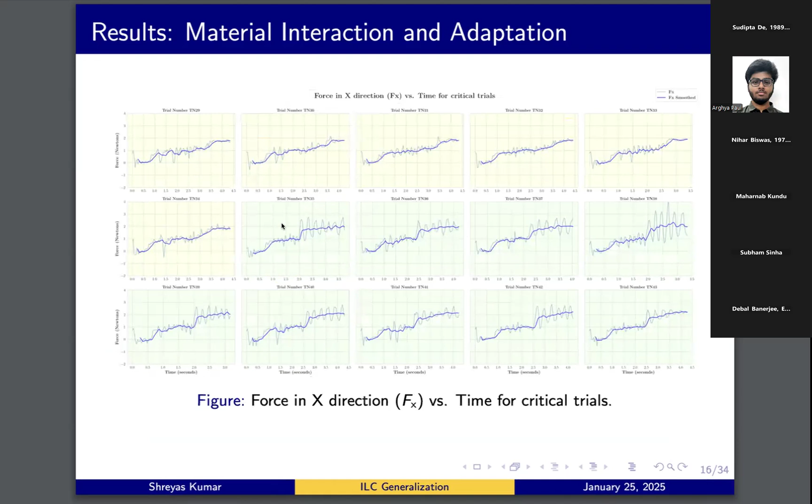These yellow shaded regions are the forces when the blade is cutting the banana, and the green ones are where the blade is cutting the cucumber. Trial by trial, the input force is increasing; here it barely touched 2 newtons, and here you can see it has crossed 2 newtons.

In conclusion, this validates the robustness and adaptability of the proposed method and demonstrates the safety feature I claimed. It also highlights potential for real-world applications, and one of the most prominent applications that comes to mind is human-robot collaboration, where it can safely interact with humans in unpredictable conditions.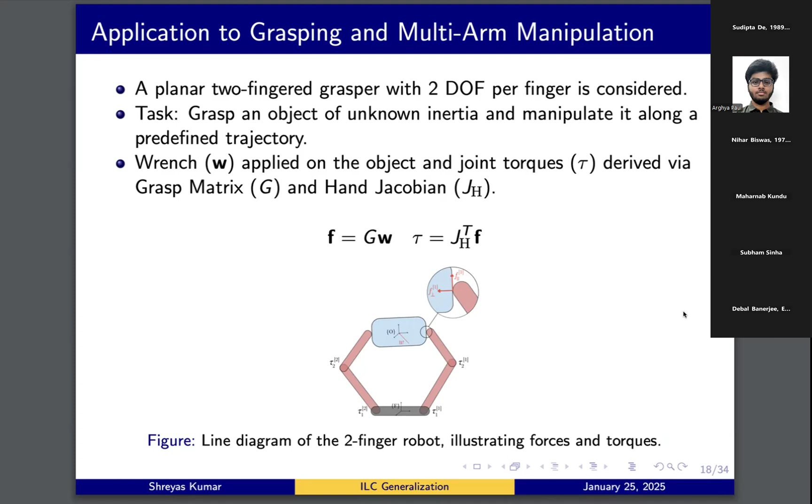Now, application to grasping and multi-arm manipulation. Here we have a planar 2-finger robot, and the task is to move an object from one point to another. To move the object, I need to apply forces on it, but my input is joint torques, so I've used the grasp matrix and hand Jacobians to go from the object wrench to joint torques.

While trying to move an object using just 2 fingers, it gets very unstable, so I need something external to stabilize it. To stabilize my grasp, I've used a path-dependent object impedance control, which makes the object behave like a spring damper system: if deflected a bit, it tries to bring it back to its desired trajectory. It's path-dependent because as the trajectory changes, it must show that impedance behavior throughout.

I also had to include a perception model combining camera input of the object position with a proprioception model, getting the object's position from joint angles and from camera data. I've used an EKF to fuse this data so I can have updates at a higher frequency, 100 Hertz.

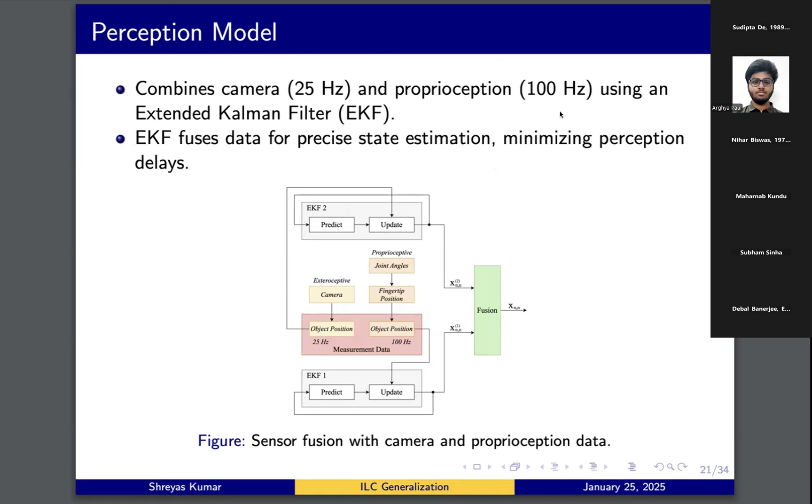This is also something novel in our work, an adaptive null space controller. The goal is to maintain a stable grasp by ensuring consistent normal force on the object. The null space controller operates in the null space of the grasp matrix, which avoids interfering with object manipulation, it applies no forces in the tangential direction, only in the normal direction, so the normal components are projected in the null space of this grasp matrix.

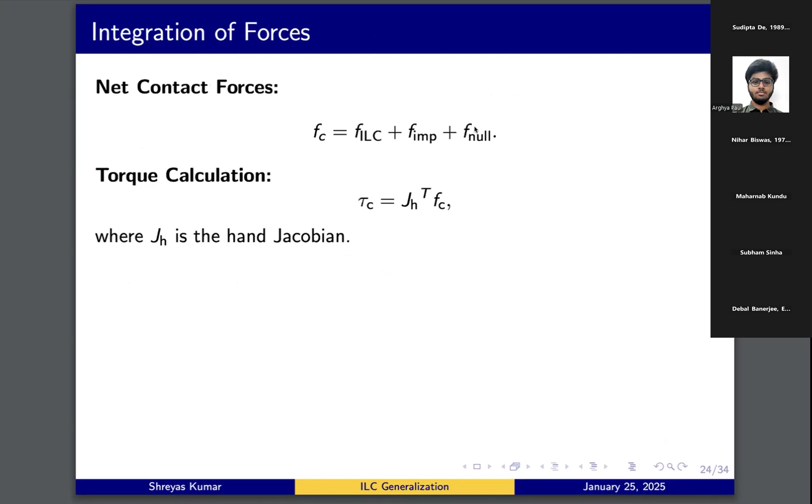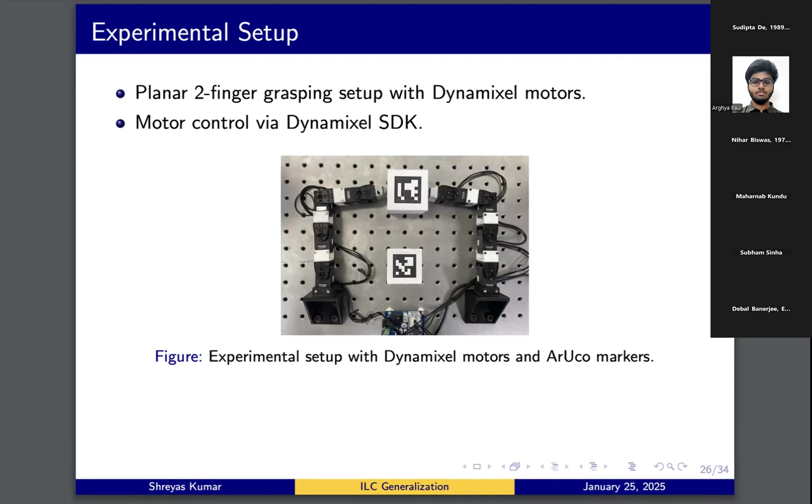And this is the experimental setup. Again, we are using Dynamixel motors, and this is a 2-finger robot, which is planar. So now the experimental results.

So the primary task is to move along a straight trajectory, and it was able to do it using ILC for 30 iterations. And once I have this learned force vector, the U input, I can modify it. So I've scaled the trajectory along x-axis by 1.25 for scenario 1, and I have rotated by 135 degrees and scaled by 0.75 for scenario 2.

Now, if you can see the normalized error, it reduces over 30 iterations and reaches here. This blue zone is the learning phase. And now, in just 4 iterations and just 3 iterations, it is able to generalize. So it is able to do those 2 scenarios in just 4 iterations. You can see the error is just dropping drastically in very few iterations. So this is the power of, again, just one equation. Everything is happening with that one ILC equation.

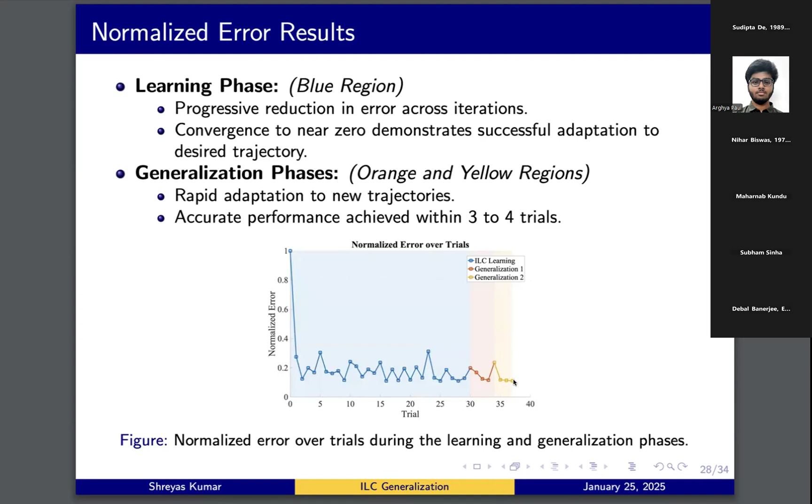So the conclusion is we have developed a novel ILC approach for robots to adapt in unknown resistance fields, and it addresses the challenges of safety, rapid learning and adaptation, and computation efficiency. Because again, it is just one equation.

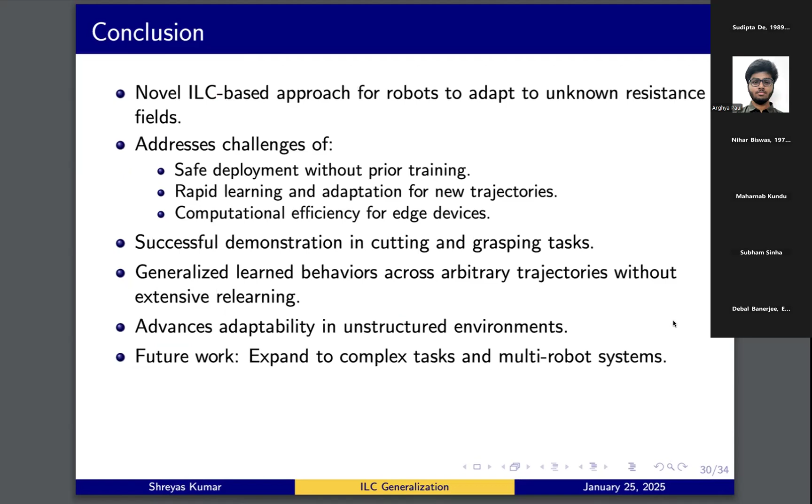Okay, Shreyas, very nice presentation. I have one question from your first experiment or first project. The question is, how do you decide that you need to proceed up to 35 trials with the banana before offering a cucumber? Okay, so considering the time constraints, I had removed some of the graphs.

So what we are doing is we're taking the normalized error. So once the normalized error drops and the previous one is lesser than a certain threshold, we decide that we have to stop now. Okay, so you have a predefined stopping criteria? We have a predefined stopping criteria. So once the error is converging, and it reaches a less value, like the previous one and the current one is less than a certain threshold, it will stop.

Okay, just one question. Do you think that this error should depend on the material through which the robot cuts? Definitely, it will depend. That is why we had used that. For different resistance fields, it can certainly take a different number of trials. So that is why we had used that threshold. We had not stopped at a particular number of trials. So the threshold is independent of the material. That's what you're saying, the threshold is independent of the material.

Okay, thank you. Any more questions from the group? So whenever you're talking about the resistance, do you mean the force? The resistive field. So when you're trying to cut through a banana, there will be some resistive field which is acting on the blade. So that is what I'm talking about.

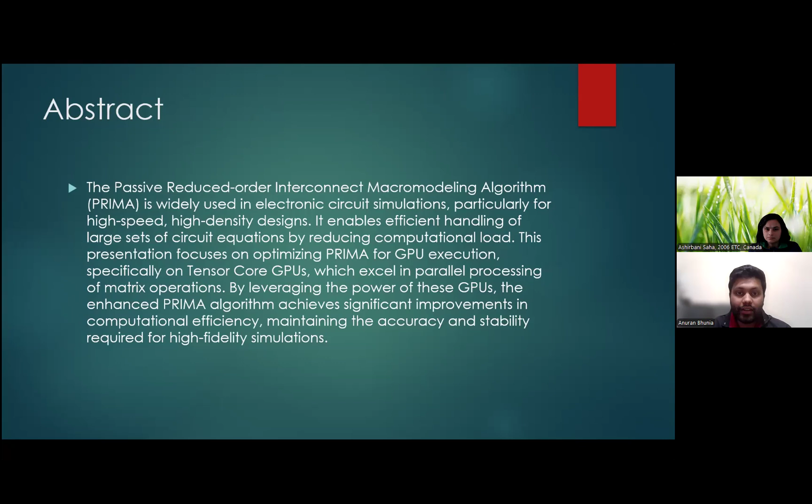So this is what I've been speaking about. One of the algorithms that can tackle higher order circuits is the PRIMA algorithm, or the Passive Reduced order Interconnect Macromodeling Algorithm. It's basically a model order reduction by moment matching technique. This starts with the modified nodal analysis matrix, the MNA matrices, from the very basics, and then it employs the Arnoldi algorithm, which uses a Krylov subspace to generate the transformation matrix, which could congruently reduce the size of the matrix while preserving the passivity and the accuracy of the simulation.

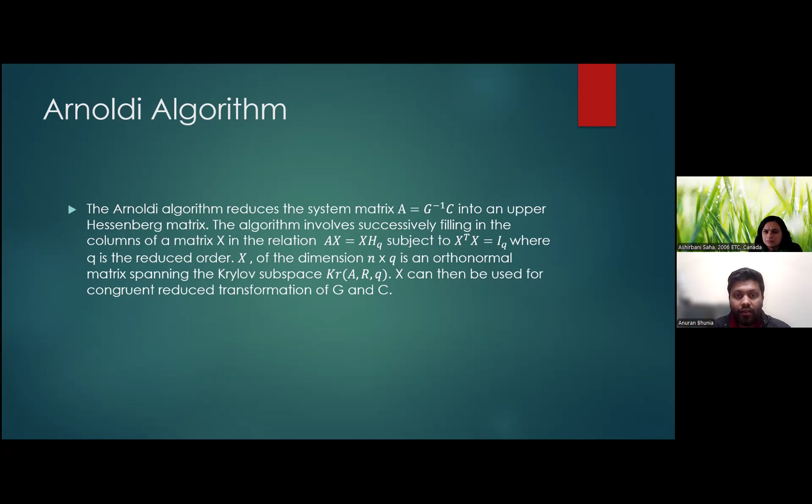So the steps in PRIMA are detailed as follows. To implement PRIMA in GPU, we had to tone down our approach because GPUs don't work the way CPUs do, and we had to heavily parallelize the structure of the algorithm so that it was more suited to GPU applications. I'll just run through the steps in PRIMA: the LU decomposition to solve for G inverse C, the Arnoldi algorithm block, which then generates the matrix X that congruently reduces the sizes of G and C to GQ and CQ, so that the matrix sizes are reduced and we could deal with lesser sizes of the matrices. Then we have the LU decomposition to solve for GQ inverse CQ. Then eigen decomposition of HQ, which further simplifies the calculation of the responses. And then we compute the poles and residues and compute the responses of each port.

For GPU acceleration, we tackle each step at a time, starting with the LU decomposition, then the Arnoldi block and the congruent transformation in the first phase. I'll be referencing this slide a lot because it outlines the algorithm in a very lucid way.

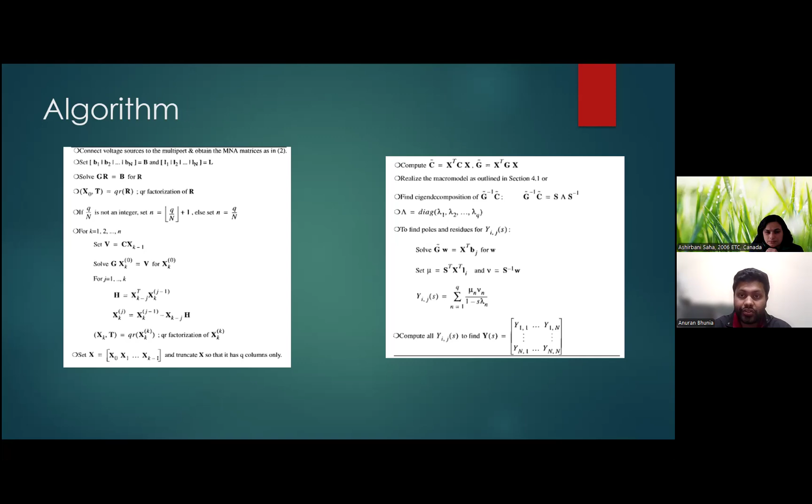This is the computational cost comparison between CPU and GPU, where the sparse LU solver didn't provide much advantage over the CPU. But as you can see, for the block Arnoldi part, the CPU takes 238 seconds while the GPU does it in 1.71 seconds.

Similarly, for the congruent transformation, which involves X transpose C X, since they were very dense matrices, it took 16 seconds for the CPU to compute, where the GPU did it in only 0.56 seconds. Similarly, for the dense LU solver, 8 seconds versus 0.5 seconds.

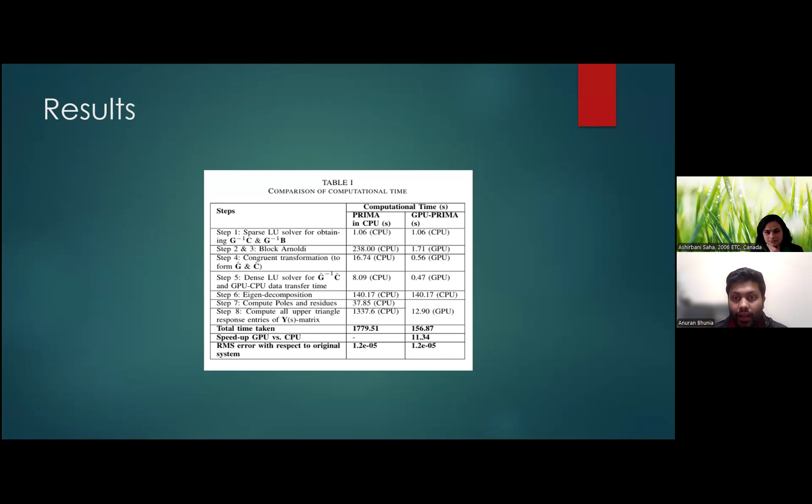Now, one of the shortcomings I'd like to point out is that I was not able to design the GPU version of an eigen decomposer, which I intend to do in the coming months. But these results are very significant for higher order circuit simulations, and we must use GPUs. GPUs are the way forward in circuit simulations.

Gone are the days where we could use sequential programs like LT-SPICE and MATLAB. Like I stated, along with the eigen decomposer, there is a much more efficient QR decomposition, which further improves performance when calculating multiplication of dense matrices. So that is one thing I'm exploring.

And that's my conclusion of the research work. And these are the references I used for my research work.

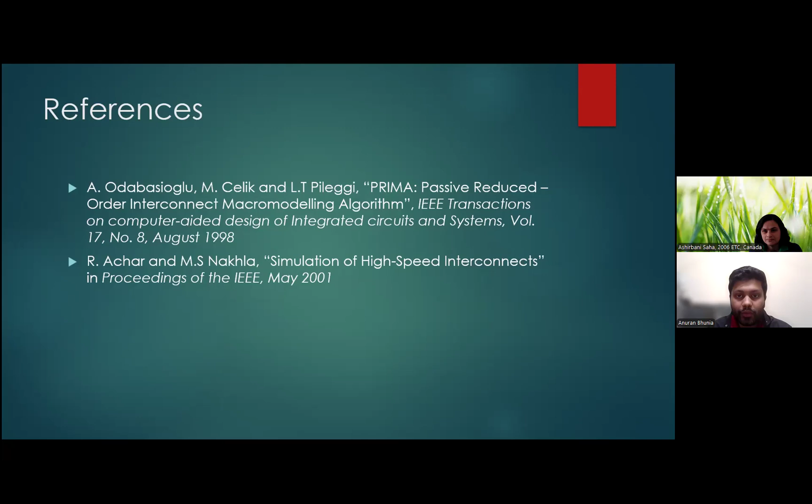A very nice presentation, Anuran. Would you please describe the details of the CPU and the GPU that you used for this simulation testing?

Both were remote servers. The GPU I used was on Compute Canada, the Narval and the Graham clusters, A100 GPU clusters. And for the sequential part, it was a very high performance CPU also provided by Compute Canada. I coded it on MATLAB.

Okay, thank you. So do we have questions? I don't have any question for him. Sorry, Sudipta, your voice is cracking. I don't have any question for him. Okay, thanks Sudipta. Any other questions?

Look, one question, can I ask? Yeah, go ahead, Anubhav. So Anuran, great presentation. What do you think about this algorithm performing when you have higher precise computations, for example floating point operations around 64?

Right, so we use the magma routines, which allow for double precision in matrix calculations. I think it would still hold up pretty well for higher order, because for this one we also tried using a 60-port network, and after this was published we also tried with 120-port networks. So you can imagine the size of the matrices, it's almost 10 to the power 2 times 10 to the power 2 - a 10,000 element matrix, and each of these has 120 ports. So it was quite computationally challenging, but it did still hold up.